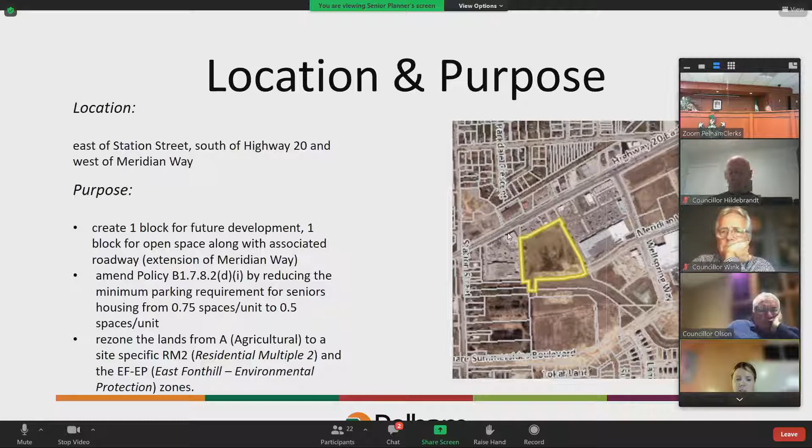The purpose of these applications: the draft plan of subdivision itself will create one block for future development, one block for open space, and another block for the associated roadway, which will be an extension of Meridian Way. The official plan amendment will amend policy B1.7.8.2(d)(i) by reducing the minimum parking requirement for seniors housing from 0.75 spaces per unit to half a space per unit. The zoning bylaw amendment application will change the zoning of the land from agricultural to a site-specific residential multiple 2 and the East Fonthill environmental protection zones.

This is the proposed draft plan of subdivision. Block 1 is reserved for future development. Block 2 is the portion that is part of the watercourse and will receive environmental protection zoning to recognize that. Block 3 is a 0.3 metre reserve where there will be a future roadway connection. This is the extension of Meridian Way, intended to connect to the future Norgate Way, which will then connect to Summersides Boulevard. Norgate Way was a road that received approval as part of the Park Place South subdivision draft plan approval.

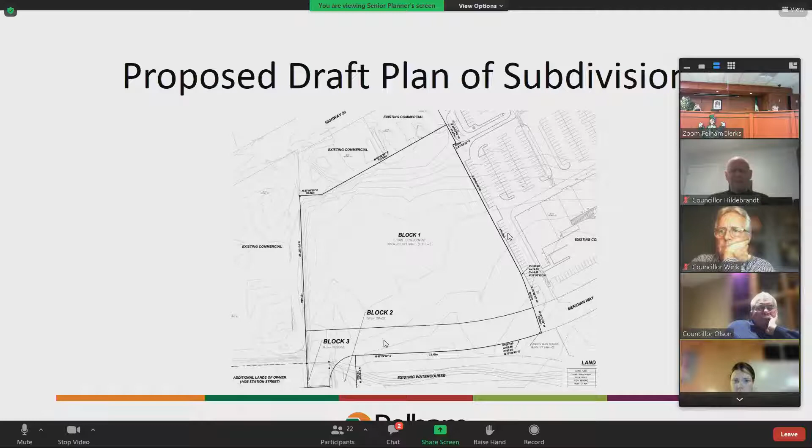The applicant has provided 3 different development concepts for this property for block 1. The first development concept is for 2 apartment dwellings and 1 residential retirement home. The residential retirement home is proposed to be 5 stories and 140 units. And the apartment buildings, one is proposed to be 5 stories with 72 units, and the second is proposed to be 4 stories with 52 units.

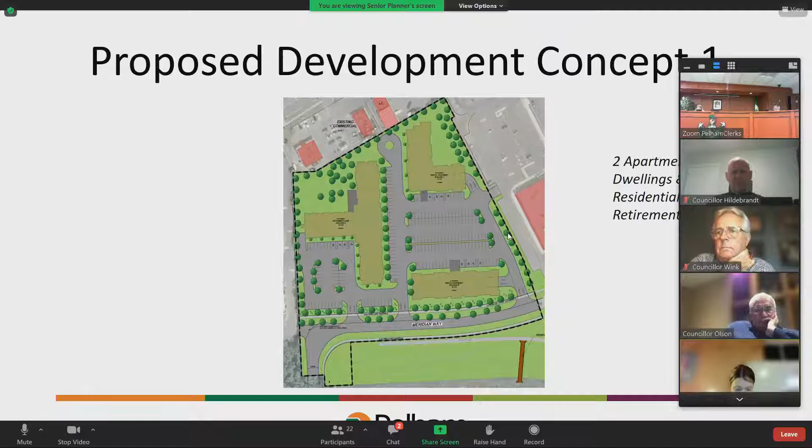The second development concept shows 2 apartment dwellings and 58 block townhouse dwellings. This concept shows the block townhouse dwellings being developed on the western portion of the property. And the 2 apartment dwellings are the same as on the first concept in terms of a 5-story and a 4-story with 72 and 52 units respectively.

And the third development concept shows the residential retirement home and 43 block townhouse dwellings. This concept shows the block townhouse dwellings on the eastern portion of the property and the residential retirement home, the same as on the first concept, with 5 stories and 140 units.

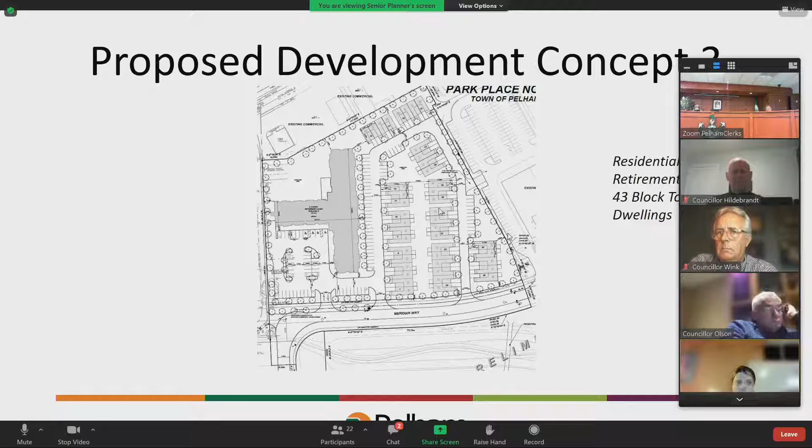In terms of the planning framework for these applications, this property is considered to be within a settlement area according to the provincial policy statement. Settlement areas are where most growth and development is to be directed. The property is considered a designated greenfield area in the growth plan for the Greater Golden Horseshoe, and designated greenfield areas are supposed to be developed as contributing to complete communities and at a density of 50 persons and jobs per hectare.

The Niagara Region official plan considers this property to be within the urban area boundary and its designated greenfield area. This area is intended to accommodate a range of different land uses. Grid street patterns are encouraged, transit supportive development, also development that can be serviced in accordance with approved servicing master plans. Similar to the growth plan, the regional official plan sets a target of 50 persons and jobs per hectare in designated greenfield areas.

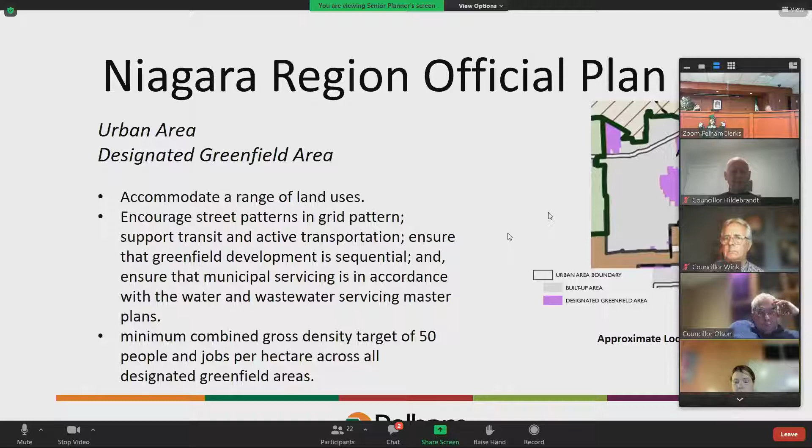The town's official plan considers this property to be within the commercial/employment center, and it's designated East Fonthill Urban Highway Commercial. This designation permits a wide range of uses: commercial offices, retail stores, tourist accommodations, townhouses, apartment buildings, seniors housing, a wide variety of uses. The minimum density is the same here in our official plan as it is in the regional policy plan and also in the growth plan, at 50 jobs and persons per hectare.

And our official plan goes a little bit further and says that residential development density should range from a minimum of 35 units per hectare up to 160 units per net hectare. The official plan also stipulates some parking guidance, which is the purpose of the official plan amendment in this case. And the only policy that doesn't comply is that the seniors housing in our official plan requires a minimum of 0.75 spaces per unit.

The town zoning bylaw zones the property as agricultural, and the requested zoning bylaw amendment would change the zoning of the property to residential multiple 2, which would permit block townhouse dwellings, apartment dwellings, nursing homes, and senior citizens homes.

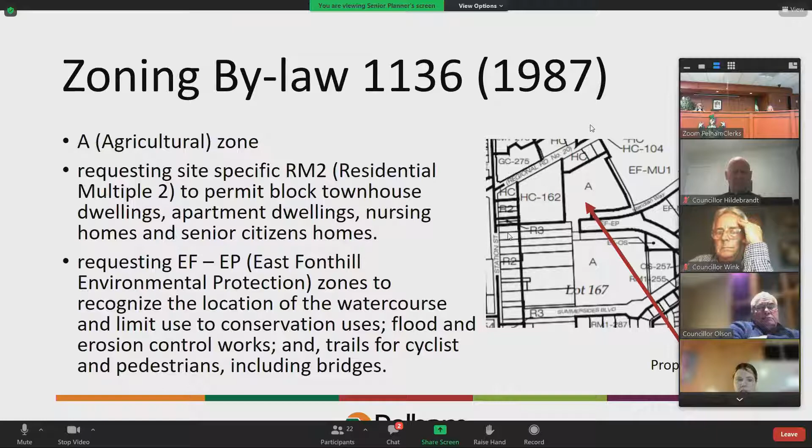It would also change the zoning of the small piece of the watercourse to East Fonthill Environmental Protection. This would limit the use to conservation uses, flood and erosion control works, and trails for cyclists and pedestrians, including bridges. There are a number of site-specific regulations that are being requested here.

One is the addition of a definition for pedestrian bridge or canopy. We don't currently define that in our zoning bylaw. That would mean a structure connected to 2 buildings for use by pedestrians to pass between 2 buildings.

There is also a request to change the parking requirements to 1.25 spaces per apartment dwelling unit, and of course the half space per nursing home or senior citizens house unit.

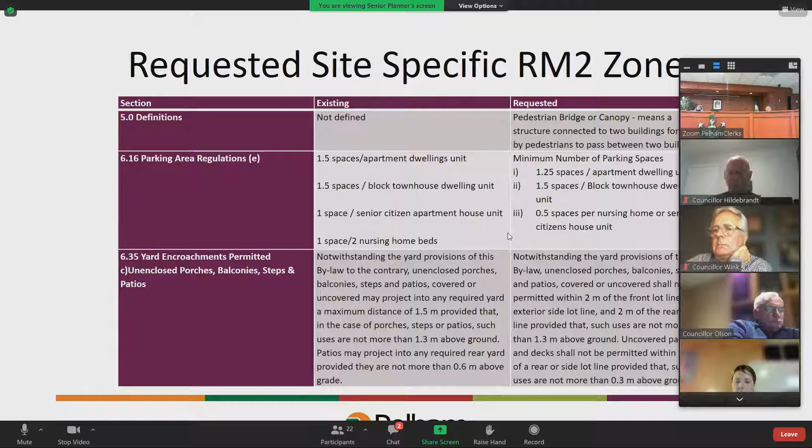There's a request to allow for encroachments of covered and uncovered porches and patios into the front and exterior side yards, as well as the rear yard, up to 2 meters. And for low uncovered porches and decks, they could go up to 1.2 meters from the rear and side lot lines.

There are some permitted uses that are being requested that aren't typically found in RM2, and in this case, it's block townhouses, nursing homes, and senior citizens apartment houses. So those would be permitted uses.

The applicant is seeking some flexibility here so that there would be the ability to develop the property in accordance with any of the 3 concept plans at this point in time.

The maximum density would be changing to 20 to 60 units per hectare. The minimum front yard will be 3 meters to the front face of the building and 6 meters to a garage, to allow for parking of a vehicle within the driveway.

The minimum interior side yard will be 1.2 meters and 6 meters where the rear of the building faces. The minimum side yard where the building faces an internal road will be 2 meters. The minimum rear yard will be 6 meters.

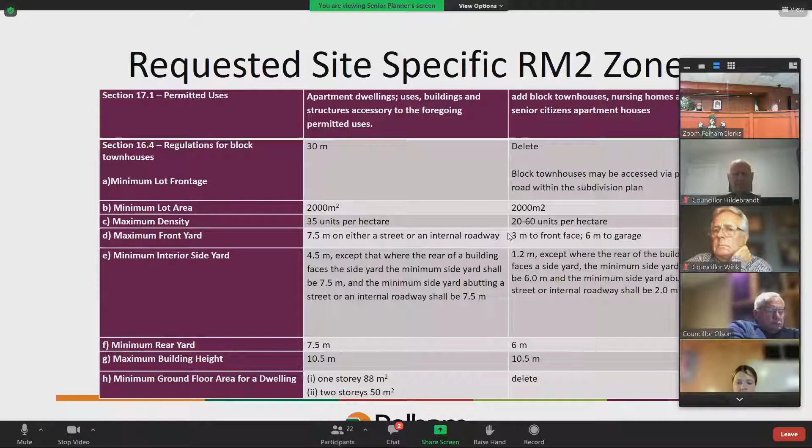Finally, there are some changes to the setbacks between townhouse units. The only one changing from the standard requirement is the setback between sides of townhouse units, which will be reduced to 3 meters.

There is a proposal to delete the requirement for planting strip and amenity area here. The planting strip requirement just isn't applicable on this property. Planting strips are typically required where the property abuts an R1 or R2 zone, and that isn't the case here. There is no R1 or R2 property adjacent to this one.

An amenity area will be provided for the block townhouses. However, that will be provided per unit rather than all in one collective area, and that would be determined through future site plan approval application and draft plan of condominium.

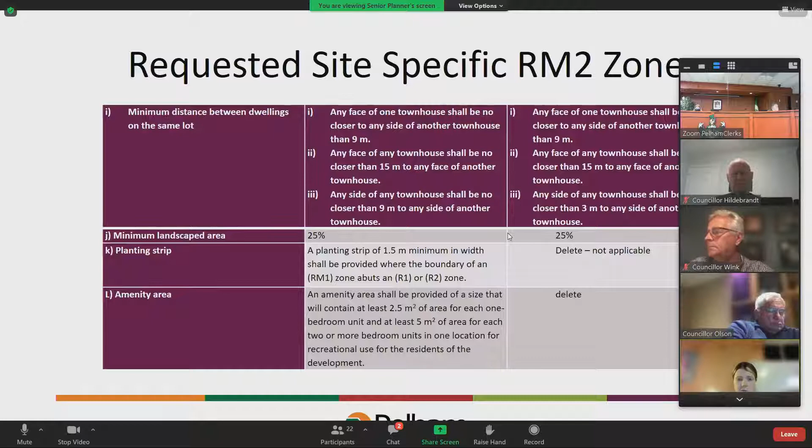The regulations being requested for apartment dwellings would also apply to nursing homes and senior citizens apartment houses. They include a minimum lot area of 75 square meters per dwelling unit, a maximum density of 130 units per hectare, a minimum front yard of 4 meters to Meridian Way, and a minimum rear yard of 7 meters to the north lot line.

These are also outlined in the planning information report. I know it's a lot of information on this PowerPoint, so there is the ability to go and look at the report for more information.

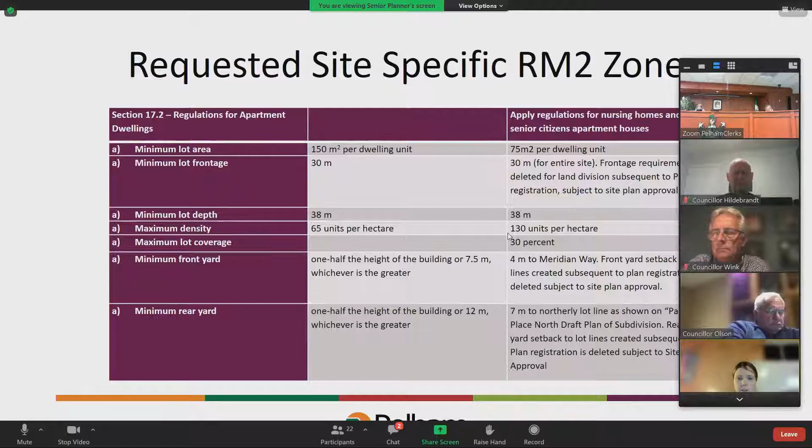The minimum interior side yard would be 4.5 meters, except 0 meters where the enclosed or unenclosed pedestrian bridge is located. The minimum exterior side yard is half the height of the building, or 7 meters to Meridian Way, whichever is greater. There's no changes being requested to standard minimum landscaped areas or building heights in this case.

But again, for the apartments and seniors housing, there is the request to delete the minimum floor areas and the amenity space. It's not that amenity space isn't being provided; it will be, it's just that it will be determined how it's developed and where exactly it's located through those future applications.

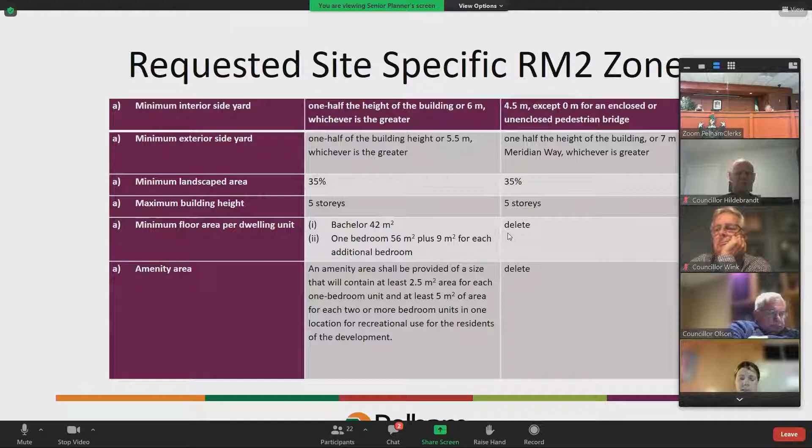These applications were circulated to commenting agencies and town departments, and the following comments were received. The region offered no objections, subject to their draft plan conditions and the watercourse portion being placed in an appropriate environmental conservation zone.

The Pelham Active Transportation Committee advised that the multi-use path that follows the watercourse from the Steve Bauer Trail opposite Kunda Park ends at the southwest corner of the Park Place North development. They encouraged that this trail provide off-road access for pedestrians and cyclists to the Meridian Center and also the commercial area on Highway 20. They feel it's very important that this multi-use path continue through the Park Place North development to Highway 20 in the area of Sobeys and the LCBO, which would provide access to the Steve Bauer Trail on the north side of Highway 20 in this location.

Bell Canada, Canada Post, and Enbridge have all requested standard conditions of approval. Hydro One has offered no comments or concerns, and Public Works provided some technical comments about the preliminary functional servicing report and plans.

No comments were received from any members of the public at this time.

A number of technical reports were provided in support of these applications. They include a planning justification report, an urban design brief, a functional servicing report, and stage 1, 2, and 3 archaeological assessments. Digital copies of these reports are available by contacting me, and I will put my contact information on the final slide.

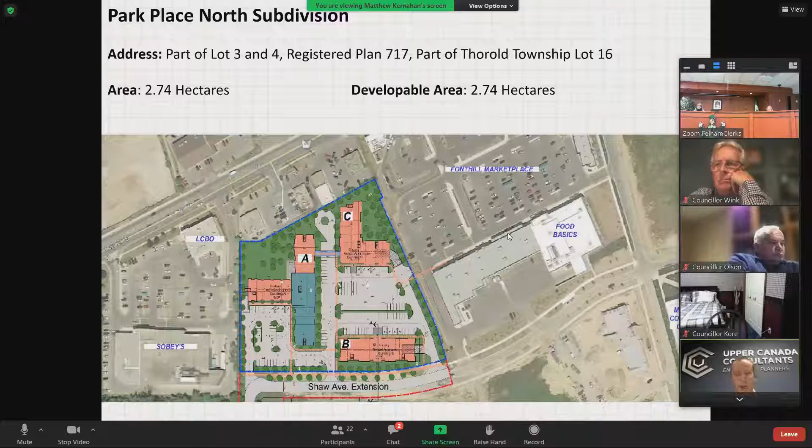Ms. LaRocque did a very thorough job explaining the details of the conceptual site plan for the development, so I won't confuse things by going into them again. However, I'd like to mention that the development vision for Park Place North is to provide an age-in-place community for residents of East Fonthill. The intention is to provide a community for older residents that allows a transition from the family home to a rental apartment and eventually into an assisted living environment.

This development provides seniors with a place to live that is convenient and in close walking proximity to shopping, parks, and community facilities. The rental apartments on the site will be provided with condominium-style amenities, and residents will be given the opportunity to share in the amenities of the retirement home located on the same site.

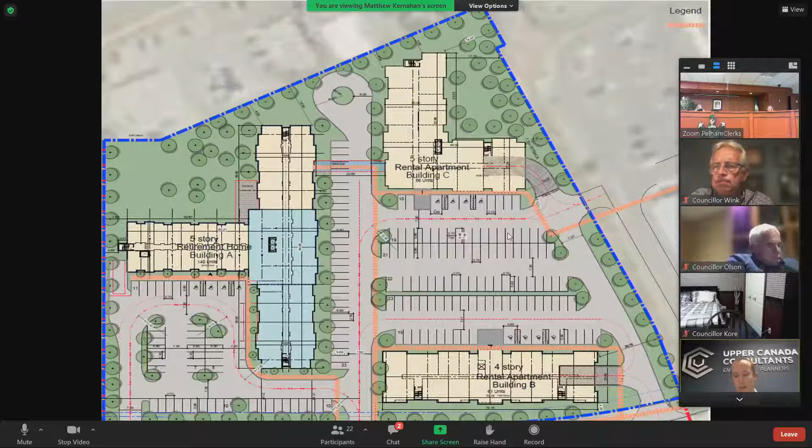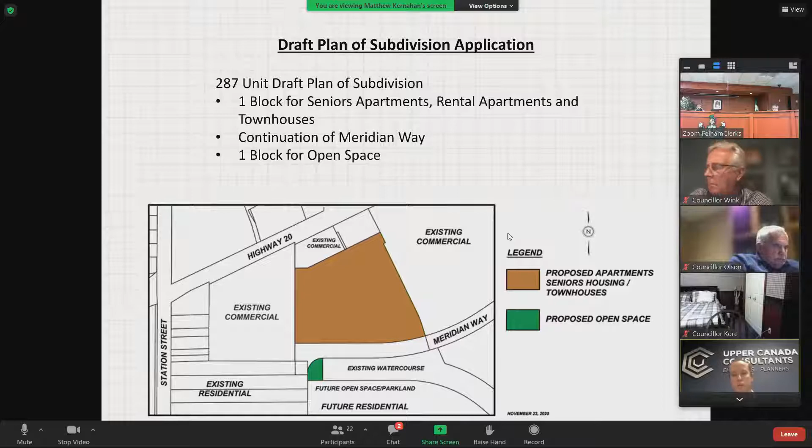As Ms. LaRocque detailed, this development is also subject to an official plan and zoning bylaw amendment. The purpose of the official plan amendment is to deal with the amount of parking provided. The East Fonthill secondary plan currently requires 0.75 parking spaces per seniors residence; however, 0.75 spaces per unit is in excess of what is actually required here, where the average age of residents is anticipated to be over 85.

Mountain View's building partner, Fram Slokker, has developed over 1,000 seniors residences in North America recently. These developments routinely include 0.5 parking spaces per resident, as proposed here, and they've experienced no issues with their developments. It should be noted that the rental apartments will be provided with 1.25 parking spaces per unit, for a total of 260 parking spaces. This is the industry standard in Pelham and smaller municipalities in Ontario generally.

It's obviously in the interest of the developer and builder to provide adequate parking for future residents, but not too much. 0.5 parking spaces per seniors unit will permit the developer to provide adequate parking while still providing ample landscaping. Additional parking would come at the cost of either reducing landscaping or incurring many dollars for underground parking.

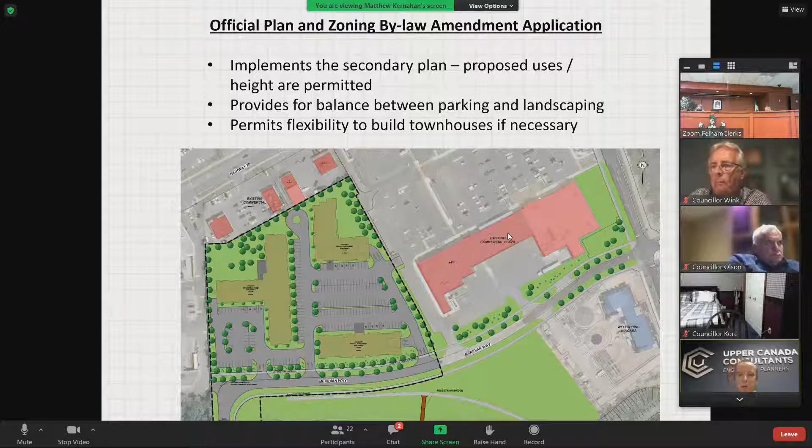Just quickly, before I hand it over to Michael to speak on the architecture, I wanted to touch again on the comments received on the application. As was mentioned, there have been no objections to this proposal from either the agencies or the public. Only standard conditions of approval have been requested from agencies, and no public comments have been received to date.

With that, I'd like to hand it over to Mr. Spaziani to provide you with some information on the architecture of the plan.

Thank you, Matt, and good evening, Council. Let me share my screen, and I'll take you through a bit of my thinking on this site from a master planning perspective. Can everyone hear me okay? Yes, that's always the question. There's usually someone who can't, so I'm glad. No, I think you're good. Thank you, excuse me, I have a bit of a cough. And that's the beauty of virtual meetings.

Seniors housing has been a real growth sector for my firm and for a lot of firms in Ontario for obvious reasons. We're getting old. I'm getting old. I don't know about you, but it's just a reality of the demographic. And when we started looking at this site, it seemed to me that Fonthill is growing well into a complete community.

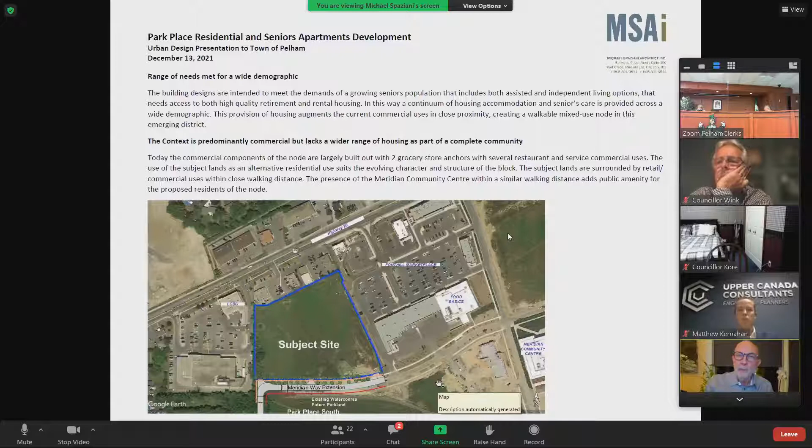And that's what seniors want. They don't want to be put out to pasture, so to speak. They want to be in the heart of it. They enjoy seeing the activity. In our experience in Ontario, and I'll take you through a number of the buildings we've designed recently, they all strive to be part of the community, important members of the community. They have buses that take seniors out on junkets, but in this case, there could be walking tours around the neighborhood to go to various shops, to go to the community center. So there are nice advantages that come with a site that is in the heart of a growing community where many other uses are coming.

I'm going to show you just a sampling of the buildings we've done recently, from various places. The top left is in Port Credit, where my office is. I work out of the west end of the GTA, and I do a lot of work in Hamilton. This project is for Chartwell, in Oakville, part of a continuum of care community that has both a retirement home and an existing long-term care facility on the site, so you get the synergy of both functions working together. The bottom left is a project in Clarkson, Port Credit, Mississauga, developed by the Reichmann Group under the Signature brand of retirement homes.

And this one is in Barrie. So this is a 4-story building, and in terms of scale and character, it's most similar to what we're proposing here in Fonthill.

It's a home of about 150 units. It includes floors that cater to people with physical disabilities, called assisted living. There's specialist staff that allow people who started as independent residents within the building to stay on when a spouse or partner gets ill and needs some physical care.

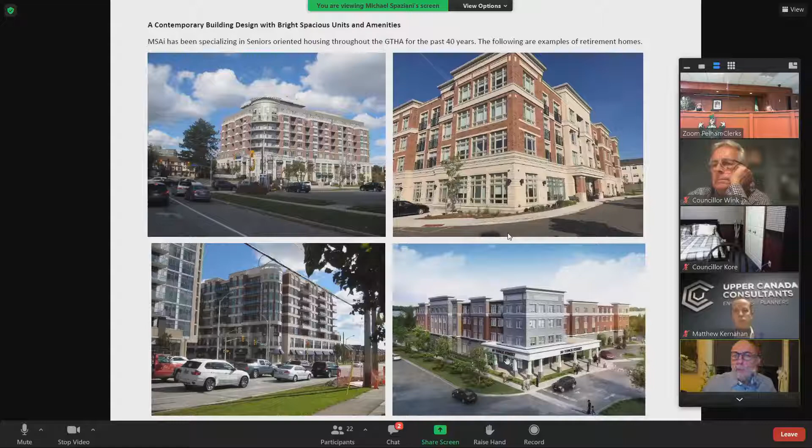These are a couple of other projects. The one on top, if you've been in Bronte, Ontario, down by the lake, is a project we designed a few years back. It's an 8-story project, but right in the heart of Bronte, where lower-rise buildings are more typical.

This one is in Scarborough, done for Chartwell. Chartwell is another client of ours, as well as the one on the right, Amica. These are big developers in the health field and the seniors field, and we've been fortunate to have projects with them throughout much of Ontario.

Because of their focus on seniors, they have great staff that look at ideas of wellness and interior design that's uplifting and bright. So this is the kind of spirit you bring to these developments—very desirable interiors with full food services. Many of these homes trade on the basis of the quality of their menu and their food.

Almost the entire ground floor of these facilities is amenity space. For a home of this size, we might be looking at about 20,000 square feet of purely amenities—lounges, pub areas, meeting rooms, craft rooms, and dining rooms. It's a big component of the development.

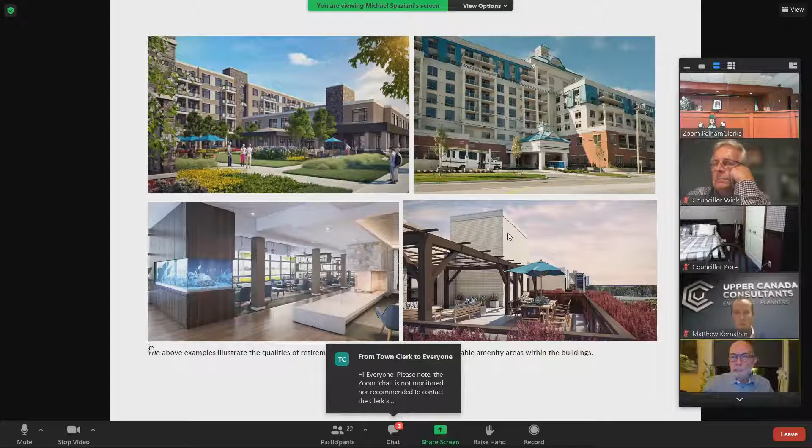For this particular site, the thinking was how to put in a pleasant living environment within what is effectively a parking lot servicing the retail. It's very important that the retail thrives because of its parking relationships. But when we look at how to design a building within that environment, we tend to pull the buildings somewhat away from the most active areas of the site.

That's why we have these green areas that provide a kind of buffer. These buildings don't front directly onto or face onto the edge of the property—they're meant to be focused on amenity spaces that are part of their development.

The exception is building B here, the apartment building, a 4-story apartment building. In this case, this building does front and face onto the watercourse, the drainage area, and the new road coming through, the Meridian Way extension. So it's a bit of an anchor that provides a strong framing of this south edge of the property.

One of the strategies for the seniors retirement home is that drop-off facilities by vehicle are very important. You've got to think about winter and rainy days, so typically we provide a large canopy and a drive-up to pick up or drop off residents for the building.

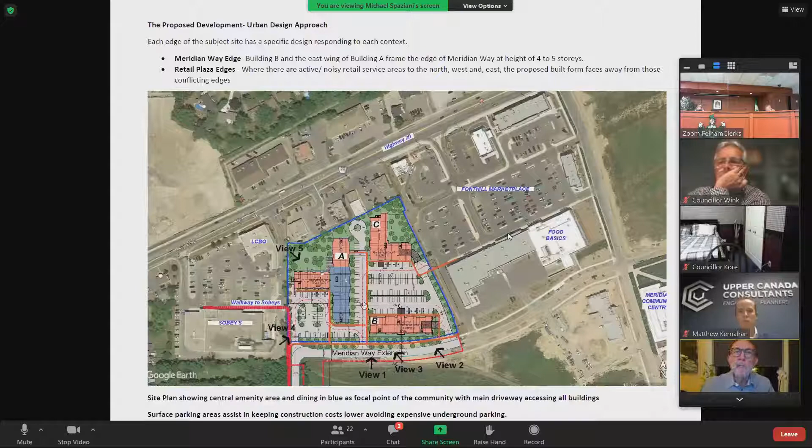There are some views identified here. The first is from the watercourse to the south. Looking at Meridian Way and looking north, you'd see the 4-story Building B, an apartment building. Residents there would consider themselves independent, perhaps aging, perhaps planning for the next stage of life. From the idea of continuum of care, they may choose to rent an apartment here for a while, knowing that in 5 to 10 years they may need to take up some of the facilities and services of the retirement home.

In some of the buildings that Fram and Slokker have done, they offer packages where you can live in this independent building but plan meals, medical treatments, or even attend special events happening in the retirement home—you can integrate these facilities. In Oakville, we actually provided an underground tunnel between the facilities to create synergies with staff access and winter access for visitors.

This is just a very quick massing study of Building B, the 4-story apartment building. It's a contemporary design but still uses elements of stone, brick, and a mix of colors to break down what is effectively a fairly long building—about 72 meters long, roughly 230 feet. So we look for ways to break down its color and mass through vertical elements, so it doesn't read like a long monolithic building.

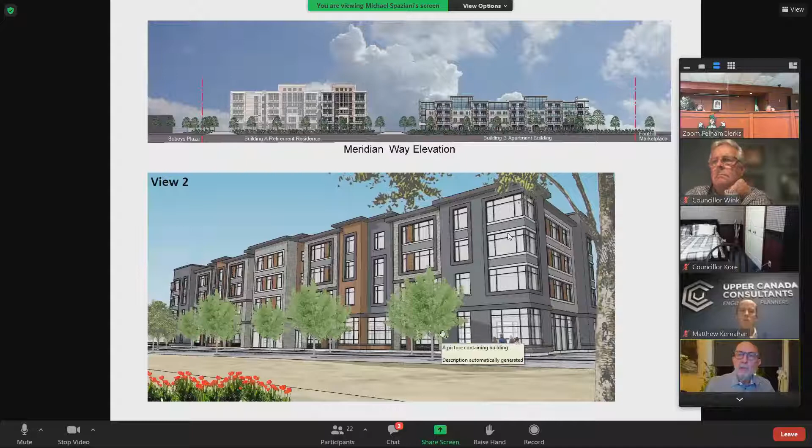If we walk along Meridian Way and step to the west end of Building B, this is the 4-story building. Beyond here you'll see the 5-story end at the beginning of the courtyard of the retirement home. That's what this image starts to show.

The principal idea along Meridian Way is to have a very lush landscape. It's important to create a larger buffer here so the landscape can have at least double rows of trees, setting the character of this front door to the development as very lush. It's an important marketing tool for future residents, and also a good response from this development to the community at large—the Meridian Way experience.

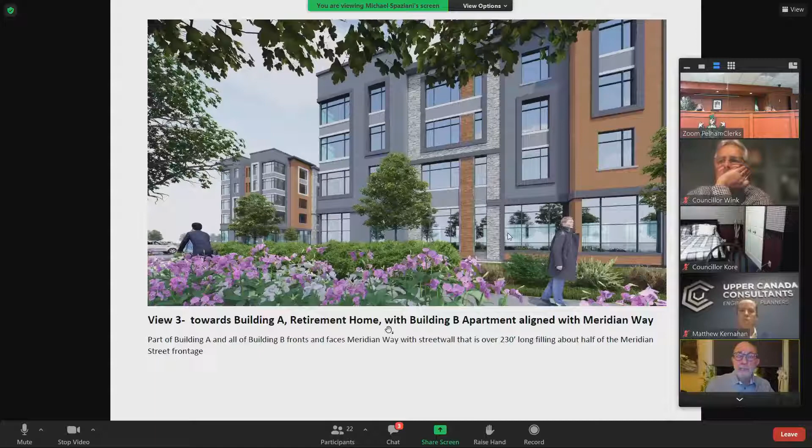Meridian Way will be a connector, back to the Meridian Community Center and also that bike trail. There's thoughts, and we've added a connection—I'll show you on the plan where we've added a connection through the site to respond to that idea of connecting with the Bauer Trail. These are important concepts.

Now, view 4 is of that entry courtyard. That entry courtyard would have maybe 30 cars, something of that nature, mostly to handle peak demand for visitors and for drop-off and pickup functions. Taxis will be important—I don't know if Uber is active yet in Fonthill, but certainly taxi services are an important component and outreach of the seniors' home.

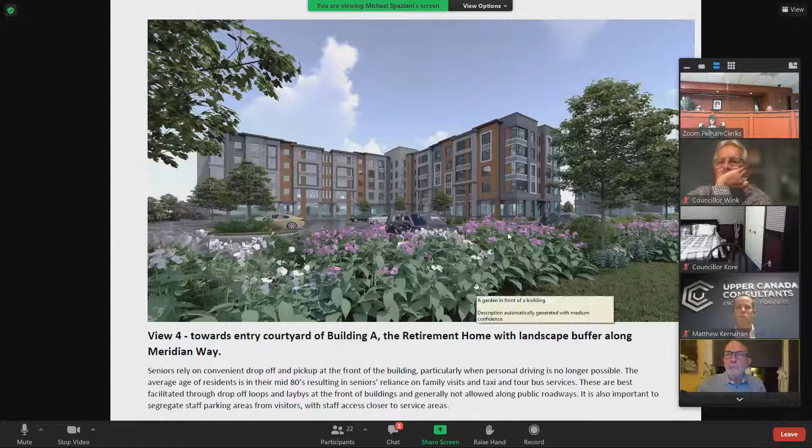So this is just a view of what that courtyard would look like, its massing, its scale, the buffer planting along the edge, and the beauty of having a long-term owner, such as Fram Slokker, who run these homes. This is not a condominium that changes hands and becomes the responsibility of condo owners. These long-term owners have a vested interest in making sure that all of this landscaping is maintained and is a feature of their facility. It's a very important component of the concept.

The other one I mentioned was the courtyard at the back. If you recall, there was a green courtyard at the back of the retirement home, and this is a very important component, especially when memory care is in play. Security and control in a very gentle way—we have to understand where all our residents are, and they can't be left to wander. You've heard stories about seniors wandering off properties, but this is a very critical component of the open space concept.

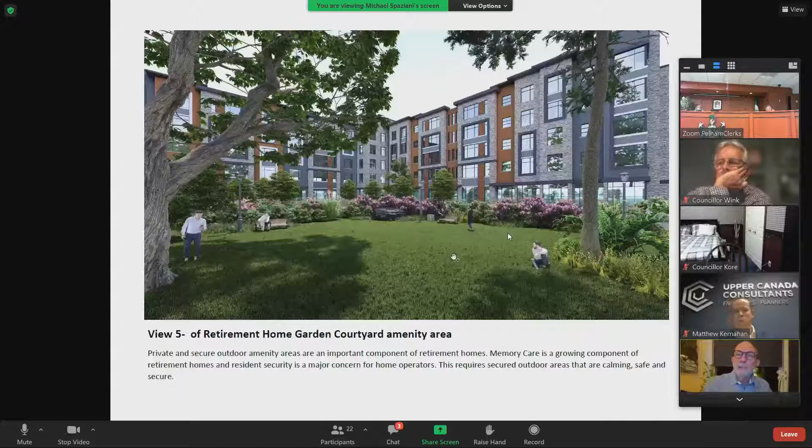As opposed to the parking side, which is the entry courtyard—paved but with edge planting—this is fully landscaped. There's no underground parking in this building, so these are all mature trees that can go in before maturity. It's a very important concept in how these homes are operated, and creates a quality of experience that's really important to the residents.

So I'll end the presentation on that. I'll leave it on this slide, which is back to the master plan for the development.

It does show the addition of this walkway, which could go to Sobeys. But what I heard today was that there's a need to get to the Bauer Trail, which is on the north side of Highway 20. So there may be options to take that trail up this way or down this way, subject to site plan detailing that we can engage with the town on.

We've also created these orange lines, which are also walkway lines, and this could be taken as a connection point to the retail in this area, or a connection point to this other retail. They show an interconnected condition here—all these pathways can be interconnected. The idea is that seniors enjoy walking in a perimeter fashion around the site when they're allowed to, when they don't have memory care issues. But generally that's happening through the front door, which has more of a control setting on it.

So those are the key elements, and these were the views we took earlier. I showed you some head-on views, some angular views of the front buildings, view 4 of the courtyard, and view 5 of the back courtyard. Building C is a future building, but it would also have a very pleasant landscape courtyard on this end. So with that, I'll end my presentation and open it up to any questions. Thank you.

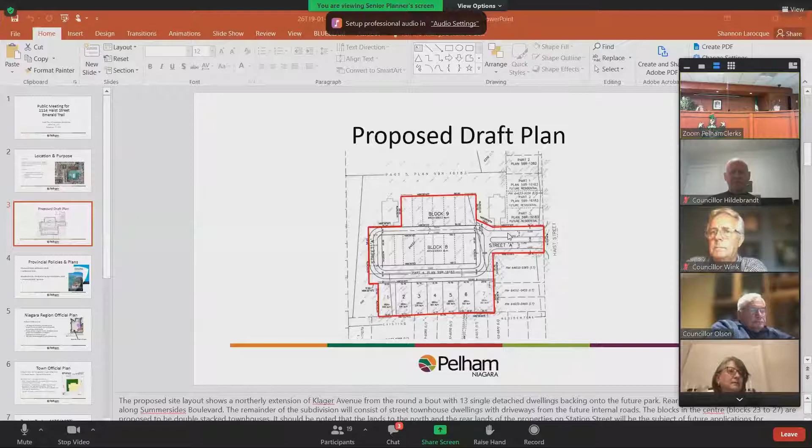Thank you, Mr. Mayor. This public meeting is for an application for draft plan of subdivision for 1114 Haist Street. This development is to be known as Emerald Trail.

The property is located on the west side of Haist Street, north of Welland Road, east of Rhodes Court, and south of the town-owned park, Harold Black Park. Many people know this property because it was the location of the former arena.

This application for draft plan of subdivision proposes 7 single detached residential lots, as well as 2 blocks for 16 street townhouse dwellings. The draft plan of subdivision would also create the associated roadway, which is known right now as Street A.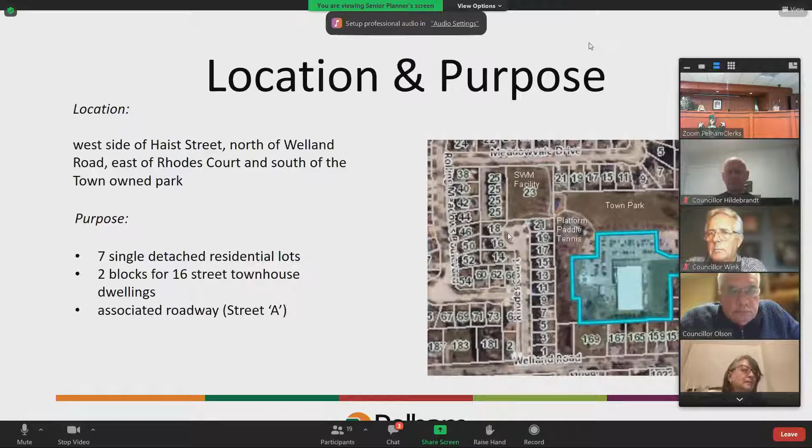We'll just go back to this one for a second here. I also wanted to note that the preferred plan endorsed by council a number of years ago for this property had actually contemplated 13 single detached dwellings and 28 townhouse dwellings. So the development we're looking at right now has been reduced from what that concept showed.

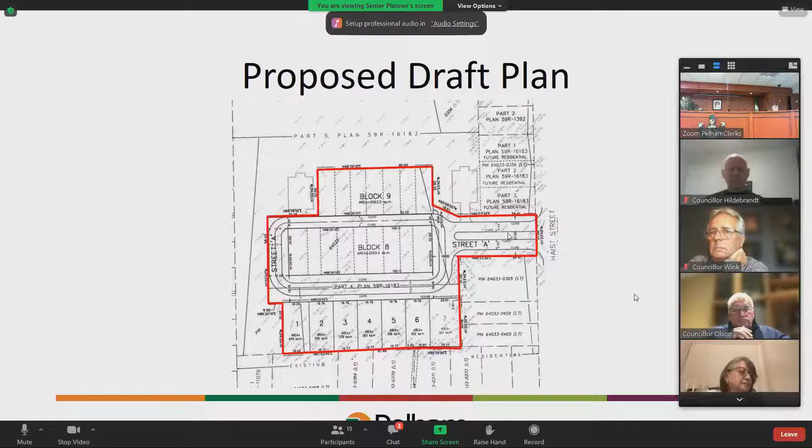In terms of the planning framework, this property is located within a settlement area in accordance with the provincial policy statement, and so it is an area where development is to be directed. The growth plan for the Greater Golden Horseshoe considers the property to be within the delineated built-up area, where half of all new development is to take place.

The region's official plan also has the property within the urban area boundary and the delineated built-up area. This allows for a full range of residential, commercial, and industrial uses, as long as services and infrastructure are available and suitable. There are policies in the region's official plan that promote higher density development and growth to help achieve a range of employment and housing types. The region's plan also sets a 15% intensification rate for new development in the town of Pelham.

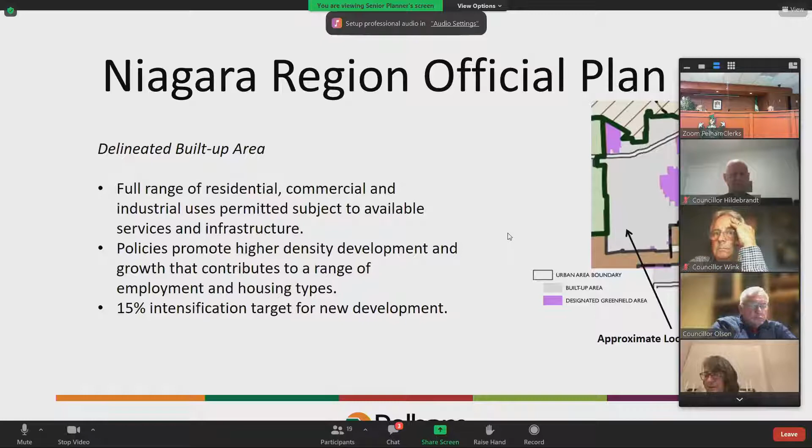The town's official plan has designated this property as the 1120 Haist Street Special Policy Area. This amendment was approved, I believe, in 2018, and the purpose was to implement the recommendations made by the town's consultant at that time to direct how the development of this property would take place.

This area is subject to the policies in B.1.1.13 of the official plan, which include urban design requirements for the built form ensuring high quality construction and design. These policies also include requirements for parkland and public space, such as street trees and lighting, sidewalks, maintenance of the wooded area, and a future pedestrian trail to connect to Welland Road. There's also a policy requiring the provision of public parking areas and on-street parking. The full policies have been included in the staff report for information if anyone wishes to read the entire policies.

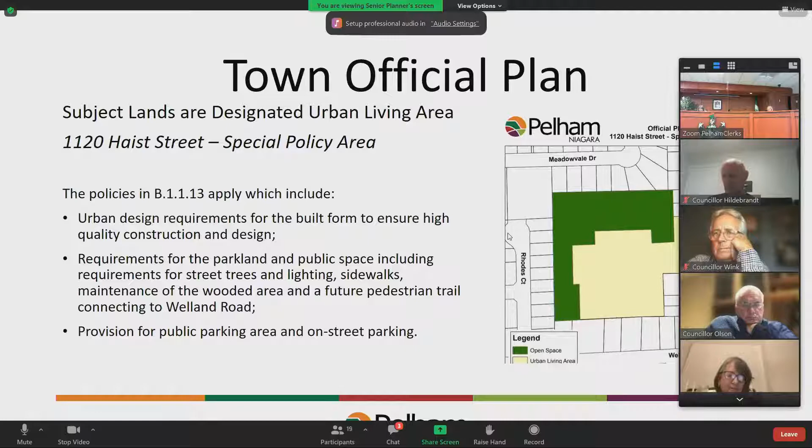The town zoning bylaw zones the property as RM1-283 and R2-284. The RM1-283 zone applies to the proposed townhouse dwellings and permits block townhouse dwellings, street townhouse dwellings, home occupations, and an accessory dwelling unit or home occupation located within a garage, with special regulations attached. The R2-284 zone applies to the proposed single detached lots and permits single detached dwellings, accessory uses, buildings, and structures, and home occupations, also subject to special regulations to facilitate future development on this property.

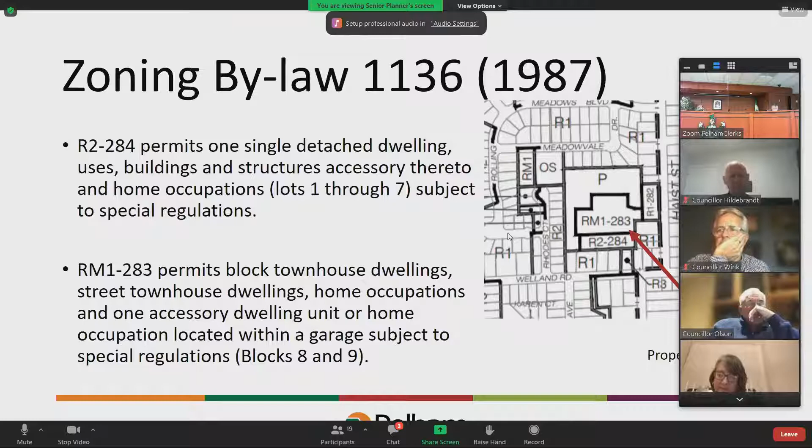This application was circulated to commenting agencies, town departments, and area residents. The region has advised that they have no objection to this application from a regional or provincial perspective, subject to draft plan conditions that they have requested and satisfaction of any local requirements.

The Niagara Peninsula Conservation Authority has advised that any work within 15 meters of the watercourse will require an NPCA work permit and their review and approval through that process. They've also advised there would be a requirement for plantings within the 15-meter buffer of that watercourse. These comments mainly pertain to the future addition of a walking trail that would connect to Welland Road.

Bell Canada, Canada Post, and Enbridge have requested standard conditions of approval. Hydro One has advised that they have no comments or concerns. Town Public Works has provided technical comments about the preliminary functional servicing report and plans.

One written comment was received from a resident, Helen Bates, requesting some information regarding the future dwellings, the proposed drainage plan, where fencing would take place, and the existing westerly ditch located behind lots 1 and 2.

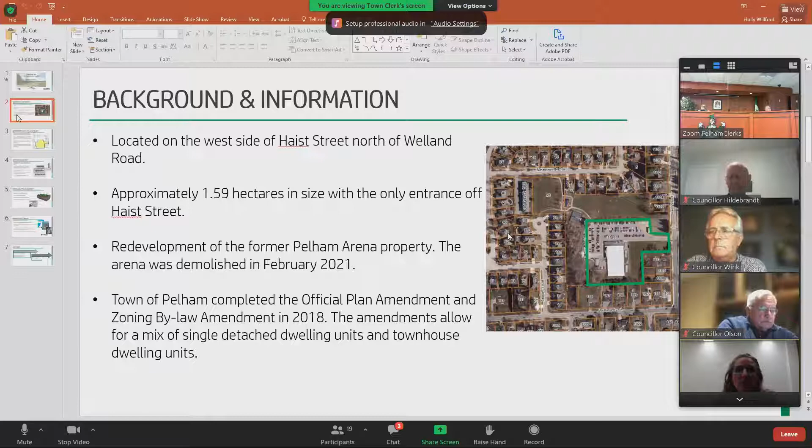The main reasons for the reduction in the number of units is primarily to provide for better drainage, larger unit sizes that are compatible with the adjoining area, the neighborhood, better parking, and more landscaping opportunities. The site is surrounded by a mix of detached 1- and 2-story dwellings, as well as townhouse dwelling units. The proposed subdivision is proposing bungalow styles, and it fits right in and is compatible with the existing housing stock.

Can we go to the second slide?

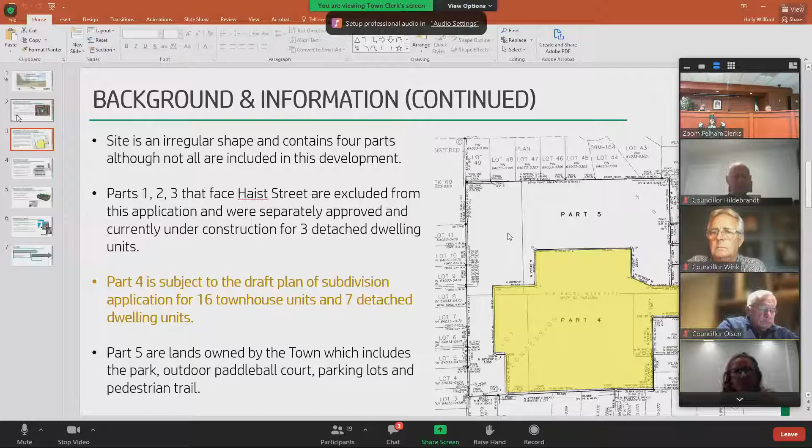This slide here highlights the area in yellow, which is owned by the developer and is referenced as Part 4 of the overall draft plan. Parts 1, 2, and 3 are the single detached lots that front Haist Street, and they are currently under construction right now. Part 5 is the area that is owned by the town, which includes the park, trail, the paddleball court, as well as those parking areas to facilitate those public uses. Next slide, please.

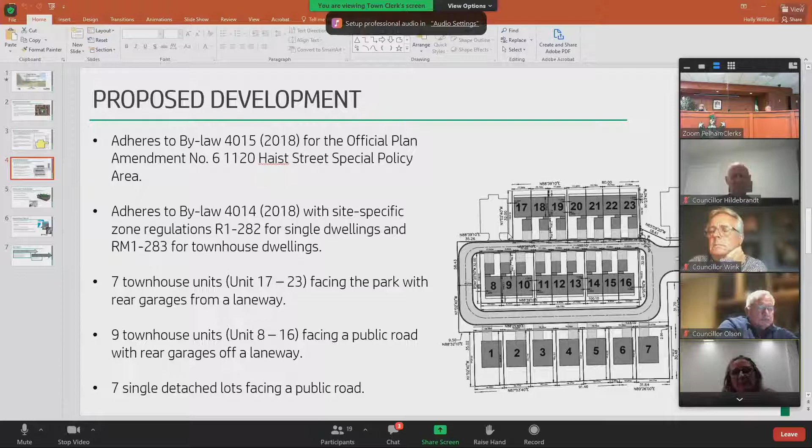This picture does not accurately or clearly show the positioning of the units, but just to note that units 17 to 23, again being bungalow style, approximately 1,500 square feet, will have their front entrances facing the park, and the garages and driveways will be coming from the laneway. The units 8 to 16, the street townhouses, a bungalow style type of unit, again approximately 1,500 square feet, will have their front entrances off the public road, but their garages will be off of the laneway. And the 7 detached dwellings, approximately about 2,000 square feet in size, will have frontages off of that public road. Next slide, please.

As previously mentioned, this development is less intense, and it's offering opportunity for more green space, to plant more trees and landscaping. The development will also utilize low impact design concepts, and this will help with the stormwater infiltration of the site. The developer will also offer the option for EV charging facilities in the units, to promote those hybrid type of vehicles and reduction of emissions. The units will be designed using high quality building materials that is consistent with the town's urban design standards, and also complementary to the existing housing in that neighborhood.

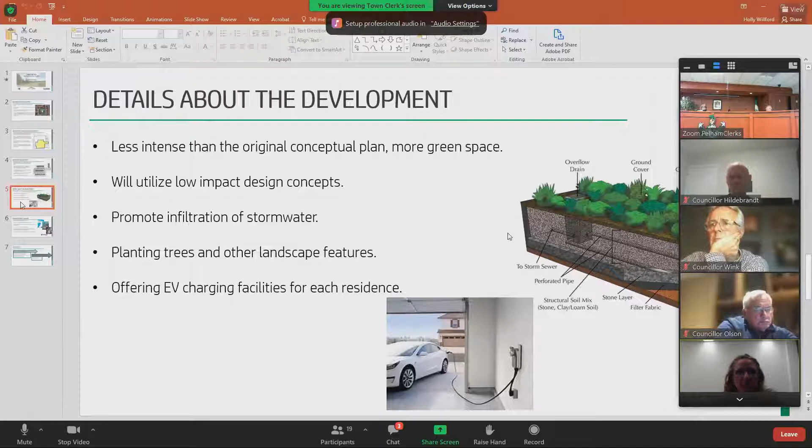As noted by Mrs. LaRocque, the proposed subdivision is consistent and does conform to all the provincial, regional, and local policies for consideration of residential intensification, primarily because it's located within the urban built boundary limits. It has access to municipal services, and this is providing an excellent opportunity to redevelop the land. We have reviewed and addressed the initial comments from commenting agencies, that being from the Niagara region and other agencies, and as noted, there are no major concerns.

As noted, one public comment has been received, and I can offer some of the responses right now. One of the comments or questions raised was, what was the square footage of the homes? So that being the single detached, and as I had indicated, they're approximately about 2,000 square feet in size. They have a frontage setback of 4.5 meters from the front of the residence to the roadway, and 6 meters from the garage to the roadway. The minimum setback from the back of the home, so the rear yard to the property line, will be 10 meters.

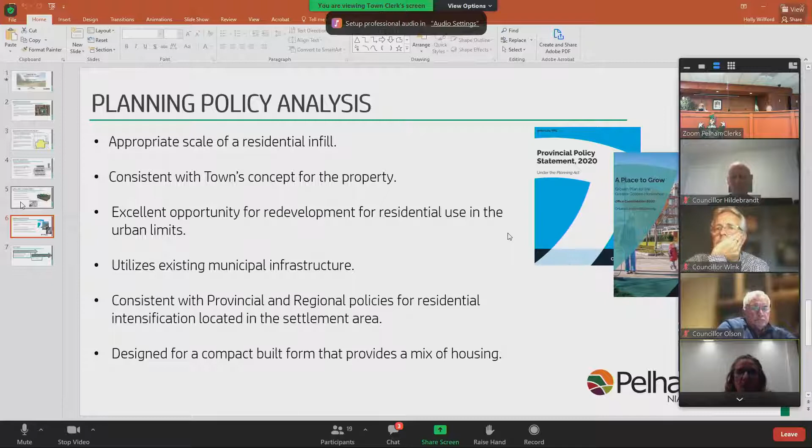Next slide, please. In terms of next steps, following this meeting and subsequent to addressing any additional concerns raised by members of the public, council, or agencies, there will be a recommendation report pending approval, and then a 20-day appeal period. Once all comments have been addressed and conditions of the draft plan approval are satisfied, the subdivision agreement will be prepared, registered on title, building permits can be issued, and the lots can be sold.

So I thank you for listening, and I am available to answer any questions you may have, and also Greg Terrace as well.